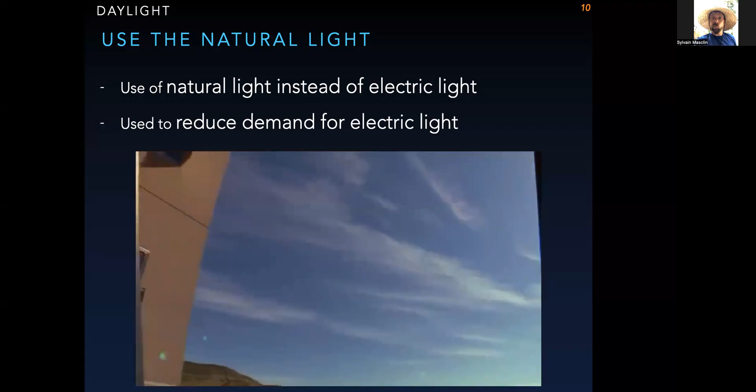To account for glare, this office building placed hoods outside around the windows. The hoods also cut down on summer heat, keeping the office cooler and more comfortable. On the inside, louvers or tinting reduce glare and also direct light to reflective surfaces inside, allowing plenty of natural light to come into work areas.

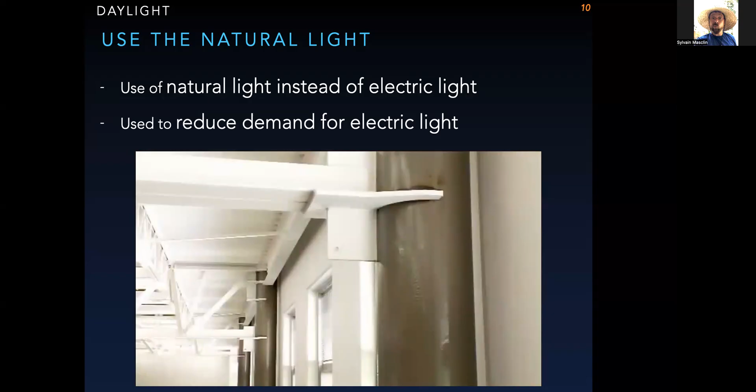One big help to daylighting is the window technologies available today. Windows are now way more energy efficient. They insulate while still letting the light you want in. And have a look at this. It's an electrochromic window. This special window changes with the brightness of the sunlight outside. As the sun tracks across the sky, it darkens to keep excess heat out. It's like giant polarized sunglasses.

Daylighting can have a positive effect. Studies have shown that with good daylighting at the office, productivity goes up and absenteeism goes down. And that's good for the bottom line. Natural lighting and heating means you use less electricity and lower your utility bill. And the more natural lighting, the more money you can save.

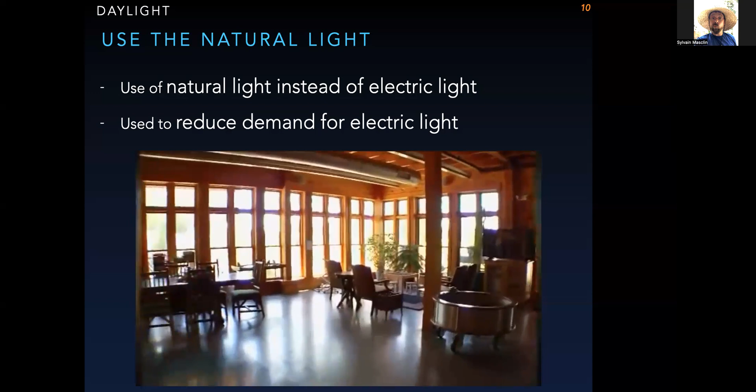So we all know that windows can provide a great view, right? But if they're placed in the right locations, they can also save you money on your utility bill. And they can help keep you more comfortable at home or work. It's called daylighting, and it takes a simple concept to a new level. Daylighting combines lots of things. Everything from the type of window, window placement, and interior design to control how sunlight comes in. They all work to maximize benefits from natural sunlight.

Check this out. Windows that face south are best in the US. They let in the most light in the winter months, but little direct sun during the summer, keeping the inside cooler. North-facing windows are also good for daylighting. They let in even natural light with little glare and little summer heat. Windows that face east and west don't work nearly as well for daylighting. They do provide lots of light in the morning and afternoon, but it often comes with lots of glare and excess heat during the summer months.

Have a look at this energy-efficient office building. The windows team up with skylights to provide most of the light you need. Notice the light color of the ceiling. It reflects and enhances the daylight so that it fills the room. And what about all the overhead lights? Most of the time, you don't need them.

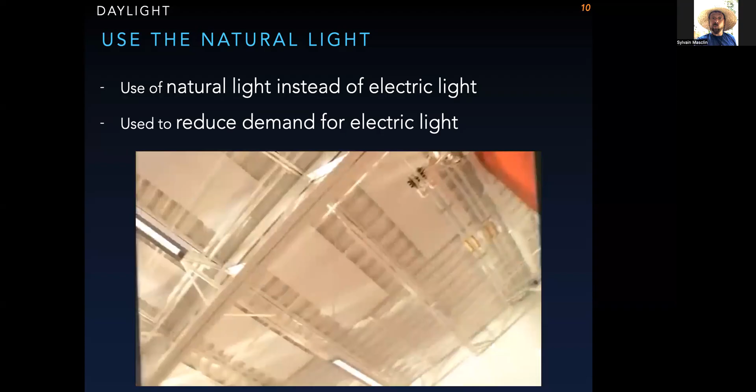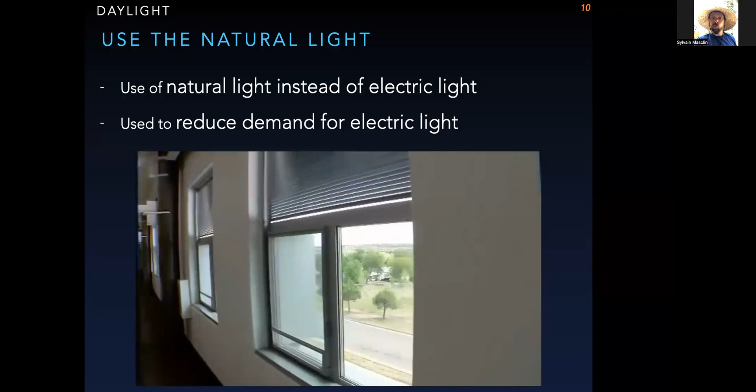To account for glare, this office building placed hoods outside around the windows. The hoods also cut down on summer heat, keeping the office cooler and more comfortable. On the inside, louvers or tinting reduce glare and also direct light to reflective surfaces inside, allowing plenty of natural light to come into work areas.

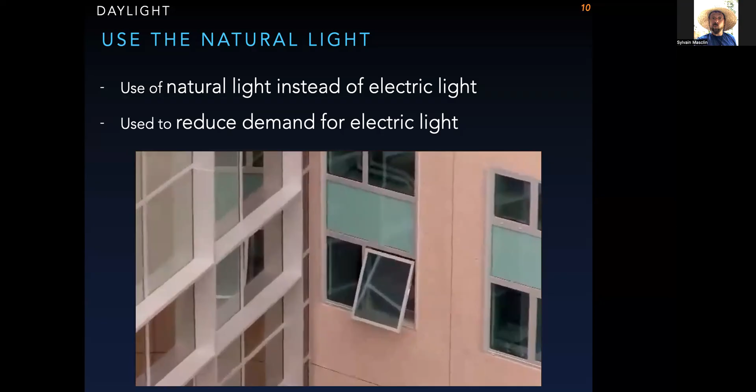One big help to daylighting is the window technologies available today. Windows are now way more energy efficient. They insulate while still letting the light you want in. And have a look at this. It's an electrochromic window. This special window changes with the brightness of the sunlight outside. As the sun tracks across the sky, it darkens to keep excess heat out. It's like giant polarized sunglasses.

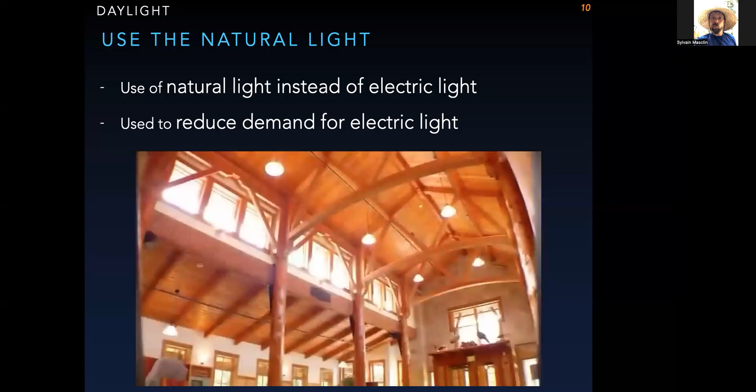Daylighting can have a positive effect. Studies have shown that with good daylighting at the office, productivity goes up and absenteeism goes down. And that's good for the bottom line. Natural lighting and heating means you use less electricity and lower your utility bill. And the more natural lighting, the more money you can save. And again, that plays a pretty good positive benefit on the mood and mind of the people.

You will see that UC Merced, for example, uses a lot of daylighting. In particular, you can find, for example, classrooms where you have the side lighting, which is in fact windows all on the side of the room that allow for full illumination, full light received within about 15 feet away from the windows, and a reduction of illumination of light coming in when you're about 30 feet away from the windows,

usually where the instructor whiteboard is located, which allows at least for a good view of the whiteboard, but also enjoying the natural lighting instead of using electricity. This is in fact an example of the Science and Engineering Building 2 that was built about 10 years ago.

We also find other daylighting strategies, such as lighting coming from the top part, which is what we call top lighting, and also some clerestories. So the top lighting, I lost my pencil right here, sorry. The top lighting will be referring to those kinds of tubes that you can find here, or windows that are on the ceiling and allow light to directly enter a room.

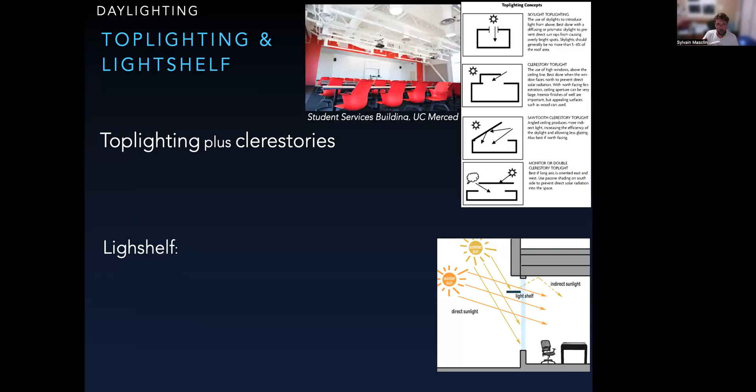Finally, for example, if you look at the dorms, you will also find the light shelf, which is not used to put your clothes and wait for your clothes to dry, but in fact it's to reflect some of the light and avoid the light coming into your bedroom or into your studio. During summertime, most of the sunlight will be in fact reflected by the light shelf, and less will enter your room, warming your room less.

But during wintertime, most of the sunlight will be allowed to enter your room and warm up your room naturally. At the same time, it allows the room to receive enough light throughout the year, reducing the amount of electricity needed. So that's the part for lighting.

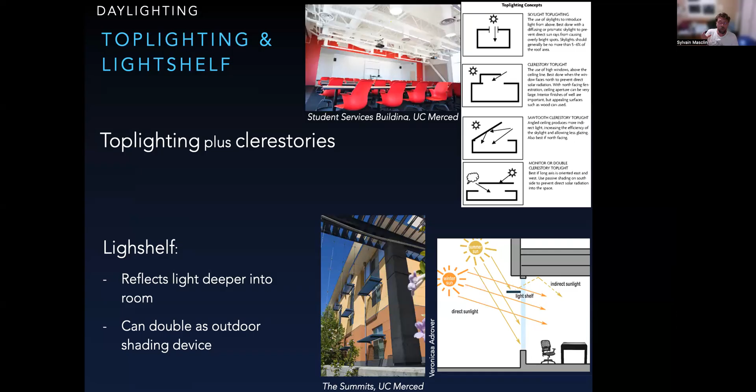What else can we do to make a building greener? Well, we can in fact use vegetation. And so we can have different ways of placing vegetation in a building. We can first have vegetation on top of the buildings, which is in fact something that happens more and more.

And this is what we call green roof. That allows for, first, a lot of things to happen with them. We have less sunlight being absorbed by the building and more reflection of the sunlight, cooling down the top part of the building that tends to be usually very, very warm. This allows for some retention of water and more humidity. This allows to have some vegetation, but also for some animals to come and to increase the biodiversity, the amount of organisms in the cities, which is a good thing.

It's helping to improve the air quality because thanks to photosynthesis, it will be absorbing the CO2. It will cool down locally. That place will go in some way in cooling down the temperature of the cities, reducing the amount of energy consumption that you use to cool down the building. So it has a lot of positive impact in itself.

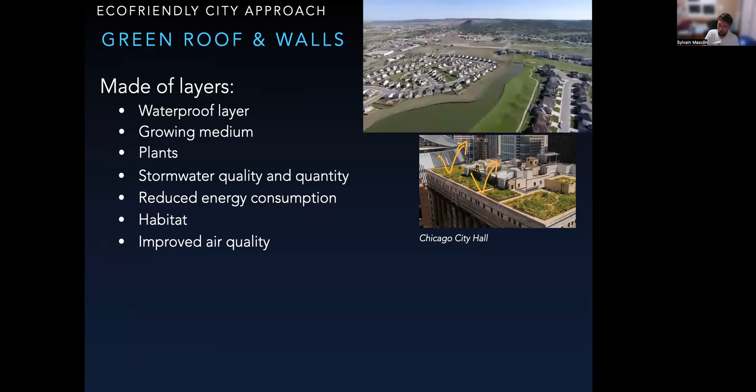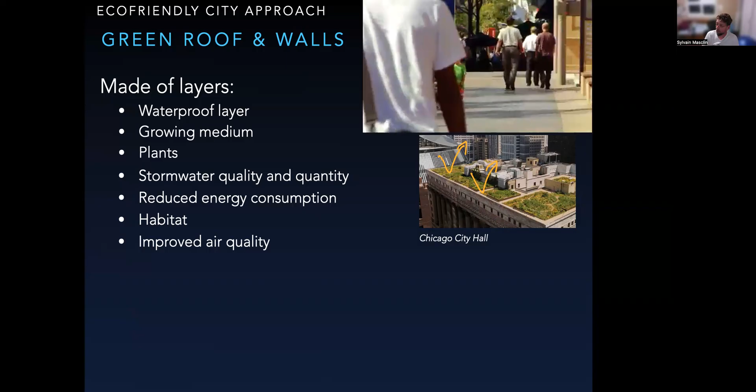Maybe you've never given much thought about what color your roof is or what it's made of. But your roof could be costing you more money than you know to cool your home or office building, especially if you live in a warmer climate. Think about it this way. In the summertime, we wear light-colored clothes because they keep us cooler. Lighter clothes reflect rather than absorb the heat of the sun. It's the same with your roof.

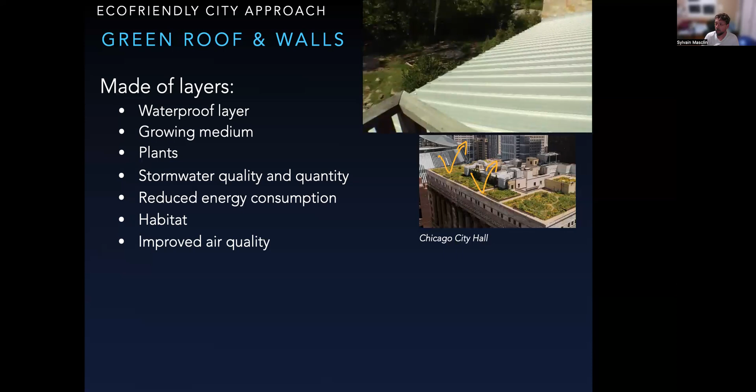A cool roof is often light in color and made of materials that have what's called high solar reflectance. That means it's able to reflect a lot of the sun's light that a conventional roof would absorb, heating up the building. You see, when the weather is warm, a conventional roof is the hottest place on the building. It can be well over 50 degrees hotter than the temperature outside. So if you don't have air conditioning, a lot of that discomfort you feel may be coming from the roof.

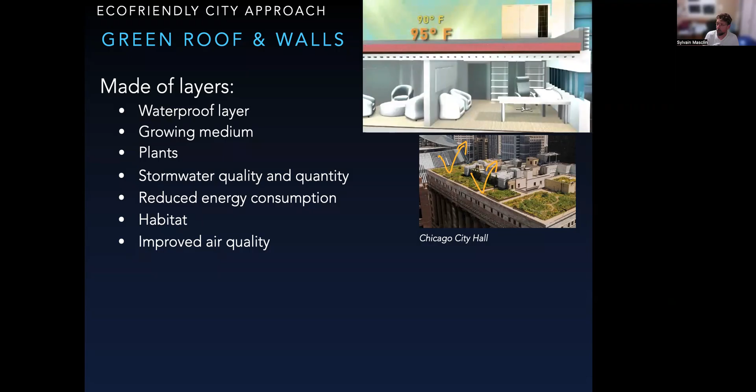If a building with a standard darker roof is air conditioned, the cost for comfort is much higher in order to counteract all that heat pouring in from above. Insulation slows the transfer of heat inside but doesn't eliminate it. Researchers have measured energy savings up to 10 to 15% for homes with cool roof coatings. And if a standard dark roof reaches 150 degrees or more, a cool roof can actually reduce the roof temperature a lot. A cool roof may only be 5 or 10 degrees warmer than the temperature outside on a hot sunny day.

Alright, so here's a big plus for the environment. A cool roof helps mitigate a phenomenon known as the urban heat island. The temperature in developed urban areas tends to be 2 to 5 degrees warmer than surrounding areas. That's because ground covered by pavement and dark buildings absorbs more heat, so the heat stays in the atmosphere longer.

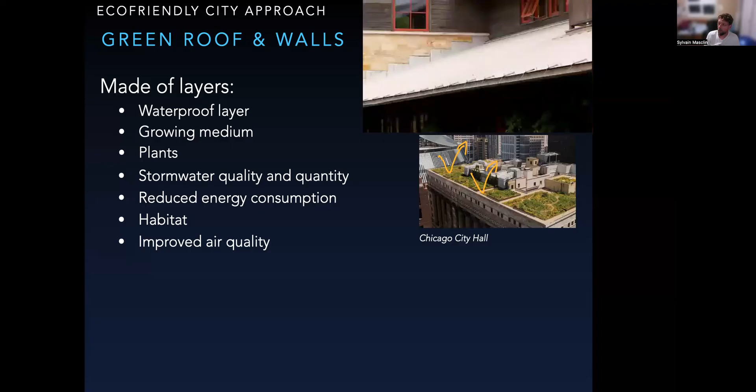A variation of the cool roof is the green roof, sometimes called a living roof. That's because flowers and plants and even a vegetable garden grow in a special soil system right on top of the building. Cool roofs aren't super high-tech, and that's part of their appeal. They're a relatively simple and effective way to improve our environment and lower energy costs.

So those green roofs also have the advantage, in comparison to the cool roof, to just use vegetation, while a cool roof will be using mostly white color. So we'll try to have very bright white painting on it, and that will need to be maintained over time, while the vegetation will require quite less maintenance and will be cheaper over time.

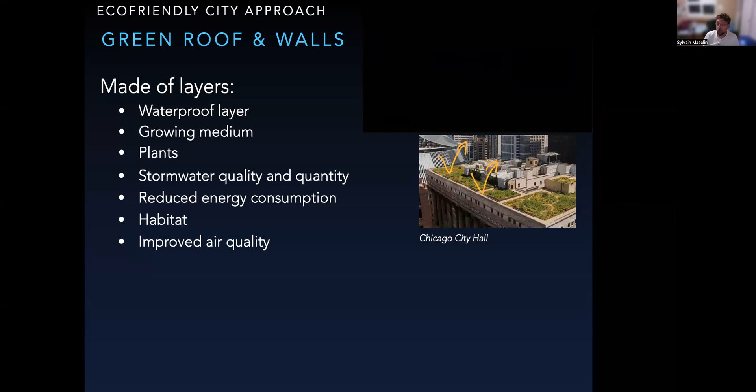We can also implement, instead of just a green roof, green living walls, where the plants will grow on the side of the wall of some of the buildings, which allows for the same benefits: a cooling down of parts of the building, a potential filtering of the air, and also some of the humidity being trapped in those walls, which allows for a feeling of a cooler temperature, also providing more habitats for biodiversity. So there has been a tendency to develop those green roofs and living walls in cities more and more, because we see the benefits of those.

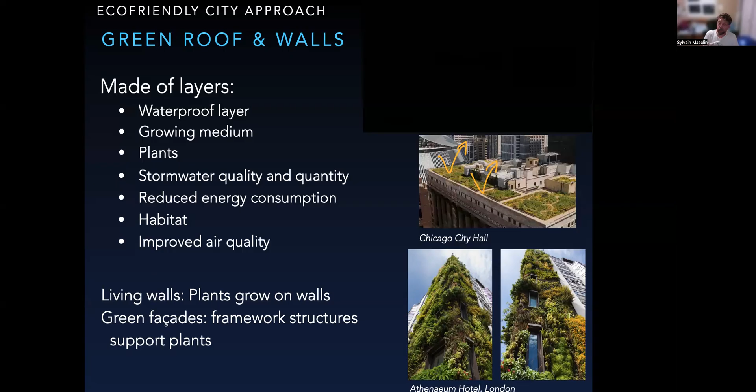Finally, a lot of new buildings go with this idea of biophilic design, in which we are trying to connect the people to nature by building a building with nature integrated into it. That can be done by having windows that are showing the nature very close to the people, and so you have this feeling of being part of nature.

It can be done also by integrating inside of malls some vegetation, some little ponds, some little trees, plants, sometimes some animals too, allowing people inside of the building to be more connected to nature, and trying also to build buildings that use more natural elements instead of concrete and man-made products, using more materials that are directly connected to nature itself.

And so with that, oh no, just one more thing to mention, after watching this movie.

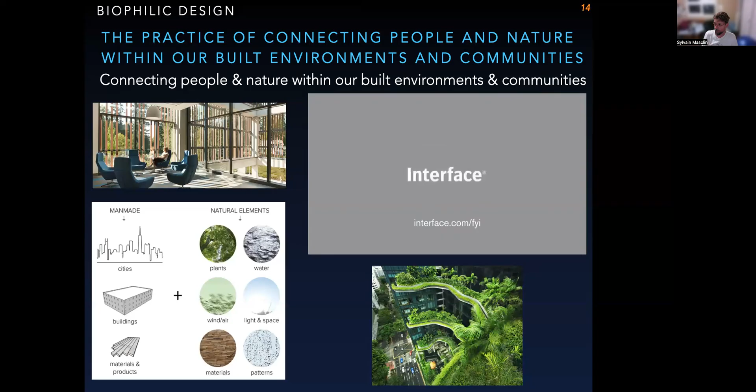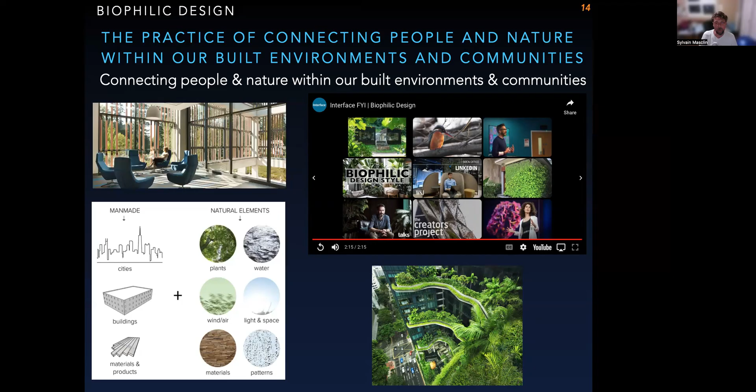Final word before the end of this video: we can also make buildings, and in fact cities, more eco-friendly, which will be the topic of our next video, by developing buildings that are more biodiversity friendly, in this case more bird friendly, built and designed. Taking the example of birds, it's interesting to see that the majority of birds are killed because of collision with buildings. Not because of cat hunting or wind turbines.

And that will be the topic of our next videos. We're moving towards green cities by first looking at a couple of aspects that are bad with our cities before moving to the very last video on what we need to do for our cities to be more eco-friendly. See you in a bit.